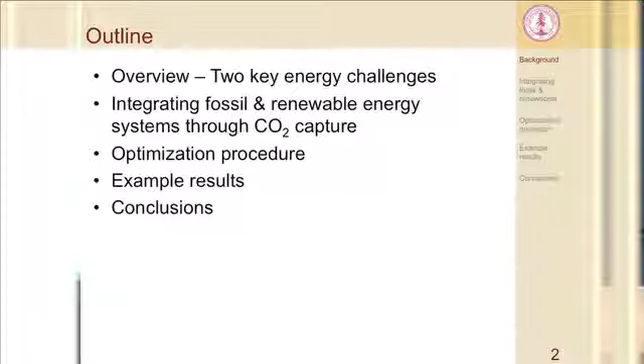So for an overview, I'll talk a little bit about what I think of as the 2 key energy challenges facing the electricity system over the next half century or so. Again, this is kind of a 2050 time frame, not necessarily next year. I'll then talk about our concept of integrating fossil and renewable energy systems together, ideally, as we think, to make a system that works better than it would otherwise if you didn't integrate these 2 systems together.

I'll talk a little bit about the optimization model that Charles has built, and he can answer, obviously, more detailed questions about that. I'll show some example results, and then we'll wrap up with some conclusions.

As far as I can tell, being a reasonably informed observer of the electricity system, I think there are 2 challenges facing electricity over the next half century. The first one is reducing greenhouse gas emissions from existing power plants. The capital intensity of investment in the electricity system, and the scales of investment required, are such that it really is a decades-long problem.

Perhaps the right way to think about this is that in order to build a power plant, let's say a large coal-fired power plant, like many that have been built in the developing world over the last 10 years, you're talking investment on the scale of billions of dollars. And the commonplace way to think about it is these come with a large mortgage, right? They come with a mortgage that is decades long. And actually this long operation lifetime is required to pay off the plant. And it's a fundamental part of the economics of the plant.

So it's actually extremely difficult economically to just say we're going to turn off these coal-fired power plants. Older ones, that will likely make sense. Newer ones, that's very difficult. And for this reason, many power plants that are operating today, particularly in other countries, have economic operating lifetimes of decades. And so the first challenge is addressing greenhouse gas emissions from this inertial built stock that we've got in the system that's going to take a very long time to filter its way through the system.

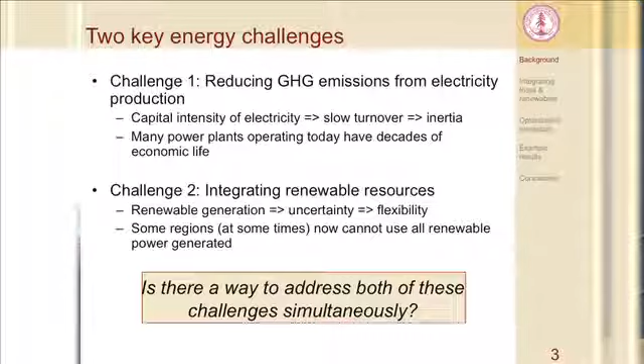This requires you to have a little bit more flexibility about how you operate the grid, with the result that some regions at some times currently, for example, can't use all the wind power that's generated, so the wind power has to be spilled. And so this is an issue as the penetration of renewables grows. This will likely become a larger issue. So our question is, is there a way to address both of these big challenges over the next century simultaneously?

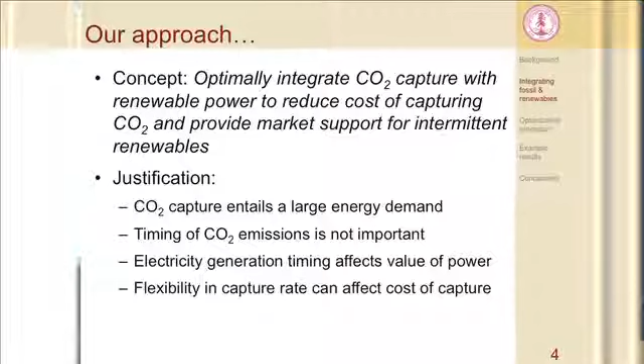So our concept here is to optimally integrate CO2 capture with renewable power such that we can reduce the overall cost of capturing CO2, that is, make it cheaper to mitigate the climate damage, while also providing support for renewable systems. The justification here is that CO2 capture is quite energy intensive, requires a significant energy demand. We're talking on the order of a third of the energy content of the primary fuel.

Secondarily, the timing of CO2 emissions is not important, right? So while the timing of electricity inputs and withdrawals from the grid is very important on a minute-to-minute time scale and even shorter, the atmosphere doesn't care so much if the emissions happen on Monday or on Tuesday, as long as, averaged over the course of whatever time period you're concerned about, you reach a target.

And so we think that flexibility in the capture rate can affect the cost of CO2 capture. A couple ways of thinking about the general concept is that the ideal CO2 capture system operates in a totally flexible manner, such that the costs of CO2 are minimized by only capturing CO2 when it's cheapest to do so, right? So you push essentially all the CO2 capture to time periods when it's least burdensome to capture the CO2.

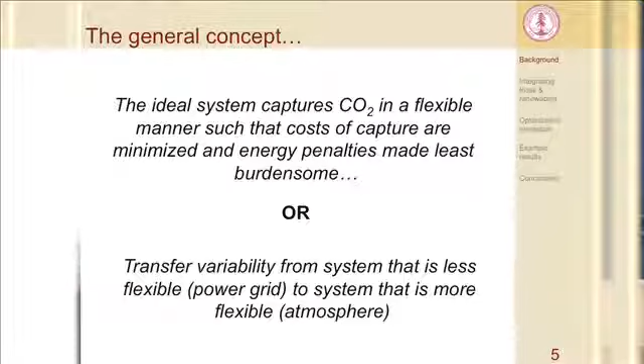Obviously, there are trade-offs, and we'll talk about that. By building in this variability, you actually increase the cost of the system, so you can only go so far. But ideally, your CO2 capture would be this sort of variable sponge that as the effective cost of capture increases and decreases, you're capturing more or less.

Another way to think about this is that we're trying to transfer variability from a system that's very intolerant to variability or unpredictability, that's the electricity grid, to a system that is very buffered over human timescales, weekly, monthly, seasonal cycles. And that's the atmosphere, right? And so we're playing off that degree of flexibility.

We're looking at trying to meet two standards in this research. These act as constraints in our system. The first one is that California requires, as of a couple of years ago, that any long-term power purchase contracts for supplying power to the state of California have a CO2 intensity less than or equal to 500 kilograms per megawatt hour. This is on order like a natural gas plant. So obviously with a coal-fired power plant, you're going to have to capture the CO2. That amounts to about half the CO2 intensity of a normal coal-fired power plant.

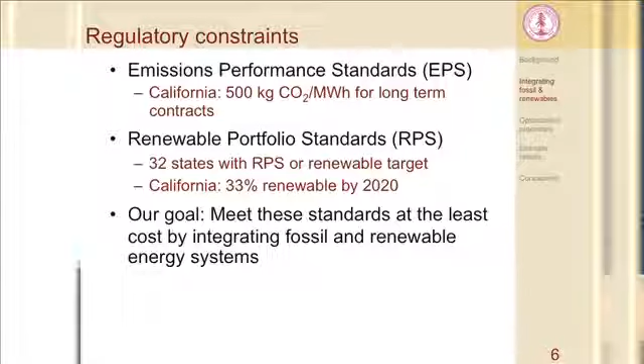The other standard is a renewable portfolio standard. California has a 33% renewable target by 2020. And so our goal is to move forward and help try and meet both of these standards at once.

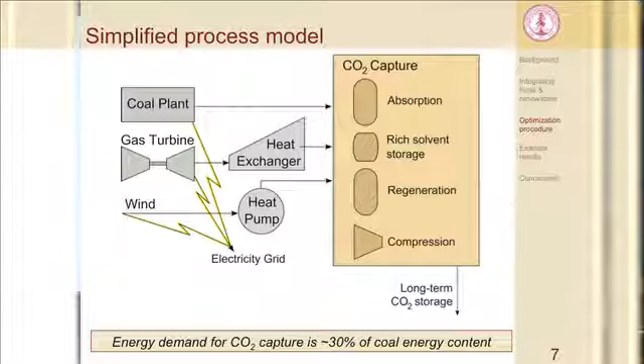We also have the possibility to integrate wind into the system, either by directly selling it to the grid as part of what we're calling a blend. That is, you would build a certain amount of wind turbines along with your coal-fired power plant to essentially get your aggregate CO2 intensity down. Or you can send wind to either a heat pump or a direct electricity to heat system to generate heat at certain times. And I'll talk about when you might want to do that.

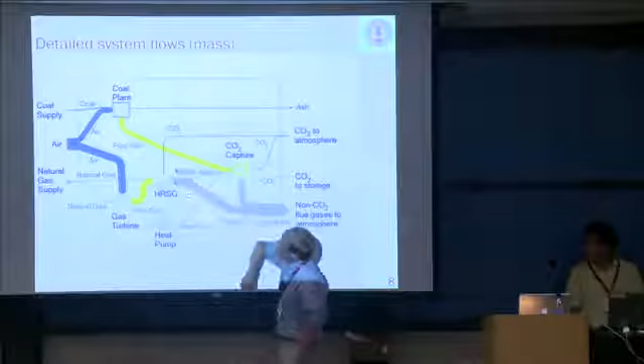This is a more detailed mass flow diagram of one instantaneous snapshot of where the mass is going in the system. You can see here that mass goes from the coal plant to the CO2 capture unit. Flue gas goes to what's called a heat recovery steam generator to generate steam, et cetera. So that's kind of the level of detail at which we're modeling things.

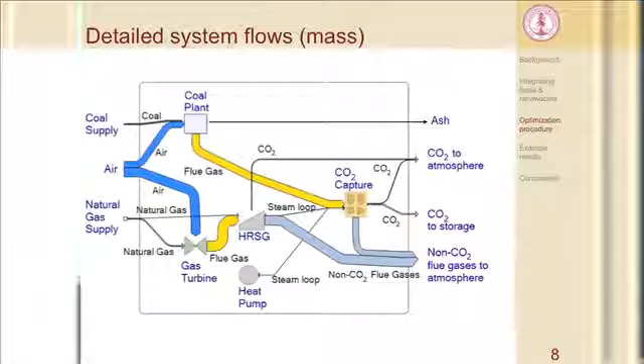The optimization framework in which we're operating requires that the model be fairly simple. It needs to be solved many thousands of times in order to optimize, and so you face a definite trade-off in these problems between increasing model complexity and the ability to get a stable, robust solution. And so it's relatively simple.

Our objective function: if you want to optimize, you need an objective function. This is basically something you're trying to maximize or minimize. Our objective function is to maximize the daily operating profit of the system, which we're taking to be the value of the power sales, that is, the value of the electricity you sell onto the grid, minus the fuel costs, how much you have to spend to purchase coal and natural gas.

We don't currently include capital costs. That's what Charles has started working on a little bit this summer, and that's going to be the next year or so. It's going to be integrating capital costs into the model.

Our decision variables: every optimization model has decision variables. If you're trying to maximize or minimize your objective function, the decision variable says, what do I have control over? So if I'm trying to maximize operating profit, what can I actually change in order to choose an optimal setup? We can turn the gas turbine up and down, so you generate more and less electricity and more and less heat using that.

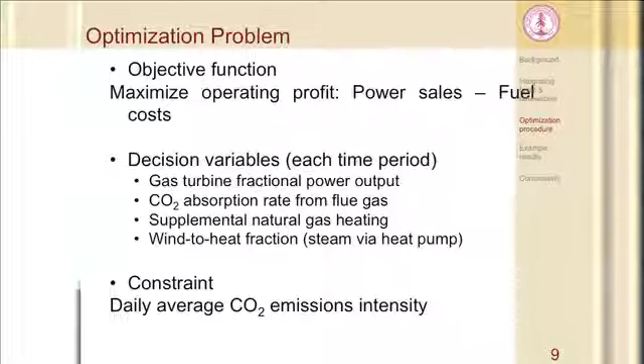You can change the CO2 absorption rate from the flue gas. You can use supplemental natural gas heating, and then we can, as I said, take wind power to heat. And we'll talk about that actually in a second.

The business model that we're modeling is actually a Wyoming to California energy sales scheme. And so the idea is that there's a lot of coal power in Wyoming. There's a number of coal-fired power plants in Wyoming. There's also a lot of wind in Wyoming. And so the idea here is to blend these together and ship a low greenhouse gas blend to California.

So we're using California electricity prices here in blue, along with Wyoming wind generation in green, and this is a sample day. So you can see here that these vary quite a lot. The electricity price in the middle of the morning at say 6 or 7 a.m. is very low. Wind power peaks in the evening.

If you're imagining this, what we're calling our sort of heuristic base case, if you're imagining this combustion turbine like a normal, what's called a peaker plant, that is a gas turbine that comes on and off during the day, you might have a price threshold. And so let's say here our profit threshold is about $60 per megawatt hour. At that point, the CO2 capture rate, or the gas turbine partial loading is turned up.

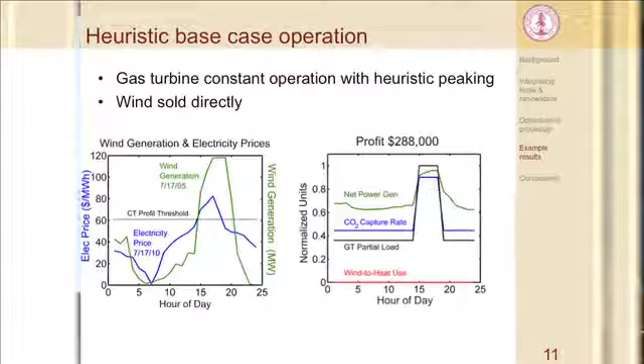That allows you to instantaneously capture more CO2 far above this sort of background level that's performed at all the other times. And so this heuristic rule is capture a minimal amount of CO2 during the rest of the day, and then when it's profitable to run the gas turbine, turn the gas turbine all the way up and capture the rest of the CO2 that you need to meet the standard at that time. That's sort of our base unoptimized case.

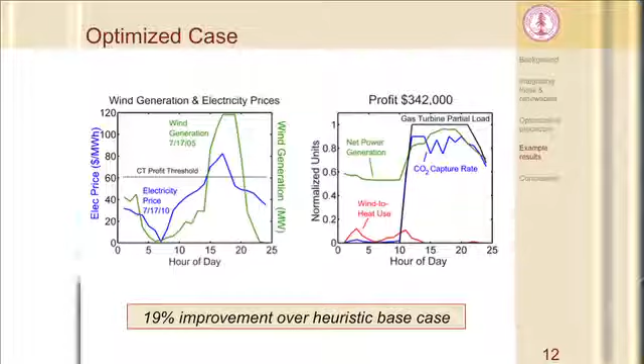Our optimized case, this is the same left-hand side here, our input of electricity price and wind power, operates very differently. You can see here that the gas turbine is turned off in the middle of the night. The CO2 capture is turned off in the middle of the night. So basically, because there's no value to the power that you sell, that you sort of co-generate along with the captured CO2, why would you capture CO2 in the middle of the night, right?

If you have a parasitic case where you're sort of taking energy off of the system, which is sort of the alternate modified system for capturing CO2, then you would not want to capture during the day when we need the power and capture it all at night, okay?

You can see here also at times where the electricity price is very low and we still have some wind power, it actually makes sense to basically suck this wind into the system that's not worth very much on the grid in order to capture the CO2. So in essence, we're sort of storing some of this wind power in the middle of the night by capturing extra CO2 during the night. That enables us to capture a little bit less during the day. So you can see here that with this optimized framework, the behavior of the system is very different than what you might imagine from the simplest kind of base case.

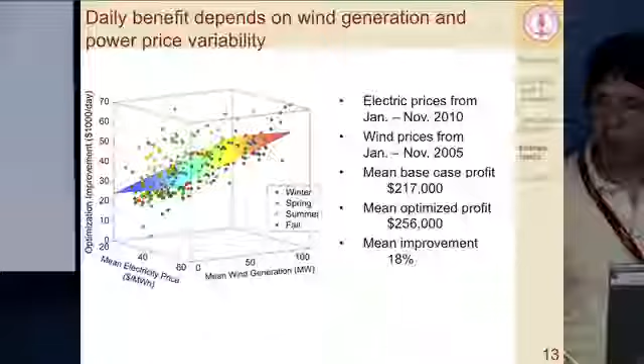The daily benefit of optimization varies a lot between days, and we can see that it varies with the amount of wind generation that's available on the grid, and also it varies with the average electricity price and actually the standard deviation of the electricity price, so how much electricity price varies over the course of the day.

And we found, it's not shown on this axis, that as the electricity price is more and more erratic, you have a larger price difference between the middle of the night and let's say peak time at 2 o'clock in the afternoon. It makes more and more sense to essentially shift this CO2 capture from one time period to another, thereby reducing the cost of CO2 capture.

What we're finding is that the mean improvement over all model days is about 18% in the daily operating profit. And so basically you can significantly reduce the economic penalty, not necessarily the energy cost, but the economic penalty of CO2 capture by basically shifting when you do it and integrating it with renewables. This is on orders similar to what's been found by a variety of researchers from the UK and from University of Texas and other people who are looking at similar sorts of systems.

So I guess our conclusion is that you shouldn't think about fossil energy systems with carbon capture and storage and renewables as necessarily separate systems, because in all likelihood we're going to be using them simultaneously. We're going to have a grid with lots of renewables on it and with coal-fired power plants with carbon capture. They're going to potentially be operating at the same time for decades, and so we need to think about how to integrate these together.

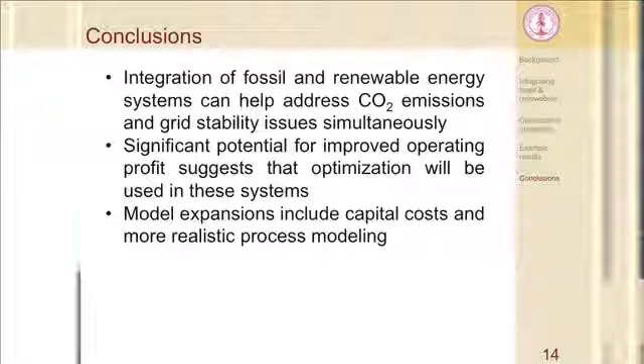We think that the significant benefit that we're seeing for optimization suggests that there's enough room here to where we should explore it further. If you only see 3 or 4% benefit, then maybe you don't go further. But we're seeing significant benefits, so we're gonna continue with the research. And then we're moving forward with capital cost estimation and more realistic process modeling.